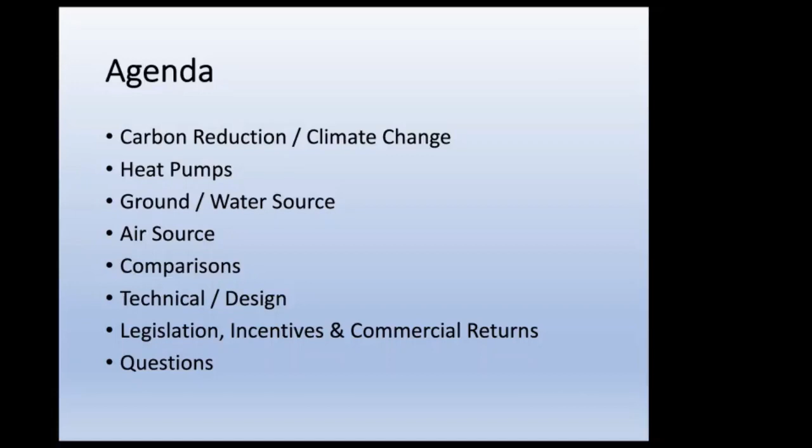So the agenda is round about carbon reduction, climate change, where we are. Probably flick through that because after last week with COP26, we're probably up to speed on that. But just an overview of heat pumps, ground and water source. I'll go through the air source, which we happen to specialise in, the comparisons between the different heat pumps, some technical, some design issues, recent legislation, some of the incentives that are available, and the issues of commercial returns. And then lastly, at the end, I'll answer any questions that you have.

The primary focus has got to be on the understanding of heat pumps and their applications. I won't read through that slide, but we're in a position now where we've got to reduce our carbon footprint. We've got to clean up the air of cities. One of the only technologies we can go to now is heat pumps. Yes, we can wait for hydrogen and perhaps potentially other technologies, but at the moment, if we want to go for net zero carbon with low local emissions, then the heat pump is the technology that we are using.

Just to go back to basics, the ultimate renewable energy source, of course, is the sun. We're capturing that energy, whether it be through the warmer water that percolates through the ground, that has captured some of the sun's energy, or indeed whether we are capturing the sun's energy in the air that we have around us. We've got to get back to that. We've got to remove ourselves from fossil fuels.

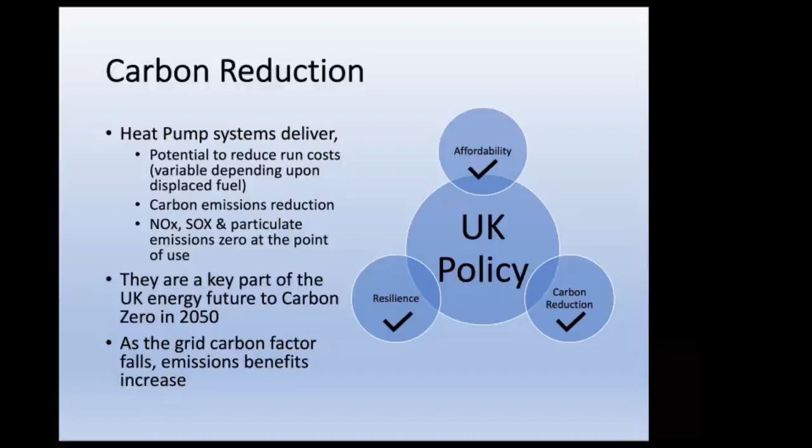Why act now? Well, I think we're at a stage, we've all read the newspapers the last few days. We are now at a time to stop irreversible damage. Current building regulations now are beginning to identify the problems and to force us away from fossil fuel dependency. Public awareness is shifting rapidly.

I think a lot of universities are finding now, for example, that the students are demanding that the campuses are decarbonised. Generational pressure. The young people want answers. They want a secure environment to live in. We've got the Greta and Attenborough effect. Every time you turn the television on, we have news of climate change devastation somewhere.

We have got the technologies now that are tried and tested, although they're not here in the UK in the numbers that they are in Scandinavia. For example, 65% of properties in Denmark are on district energy, and heat pumps are the go-to technology for district energy centres. So although it's not here, we can bring that technology over. It is tried and tested, and we can begin to modify it as we must and introduce it into the UK.

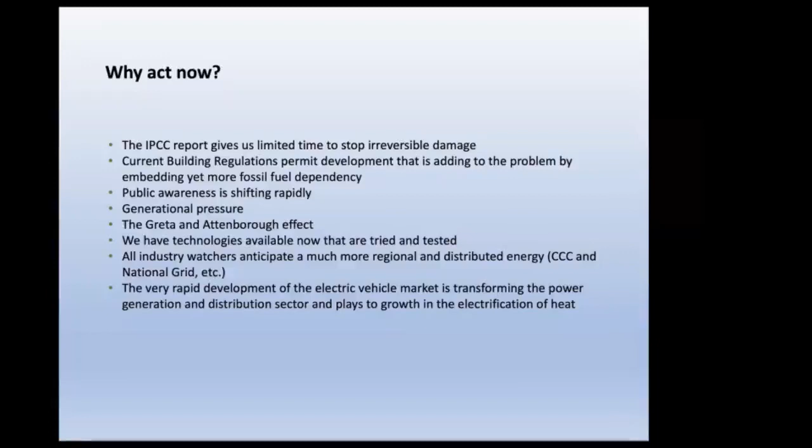We've also got the rapid development of the electric vehicle market, and we've got to hope that the national grid can cope with the pressures that heat pumps and electric vehicles will place on the systems. I guess you've all seen those graphs before. The decarbonisation of the grid, the carbon levels now are a fraction of what they were, and going forward past 2032, they're only heading in one direction.

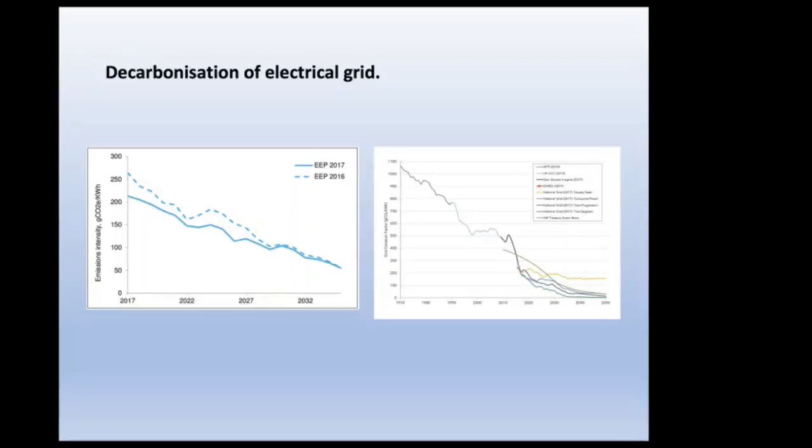We were up a few years ago at 500 grams per kilowatt of electricity. Now we're right down into the tens, occasionally get as low as 80, but certainly averaging between 100 and 200. This is an indication of a sample of the national grid. One particular day recently, 83 grams CO2 per kilowatt hour, predominantly, of course, wind and solar, nuclear, gas, biomass. Lower down the table, no coal showing at all.

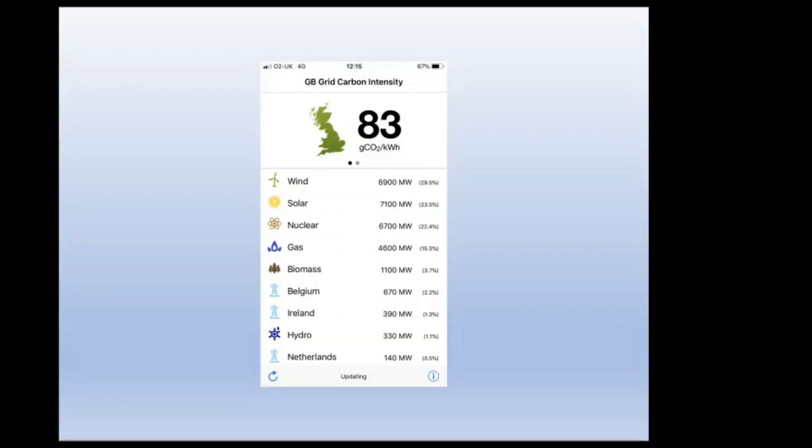Of course, we are still weather dependent. We have to remember that the gas will be with us for some time. We can't depend upon certainly wind and solar. And although there's some good news about smaller nuclear plants, that's going to take some time. But what we can do is we can capture the low carbon electricity that is available. We can use that with good COPs on heat pumps and turn that into very good and clean thermal energy.

If we continue that vein, if we look at the black square there, we've got coal generating 630 grams per kilowatt hour delivered heat, going down oil, gas, direct electric heating, which of course is 100%. But then if you look at ground source, we've got 320% if we have a COP of 3.2, or indeed 400% if we get to 4, which is perfectly possible, especially on ground source.

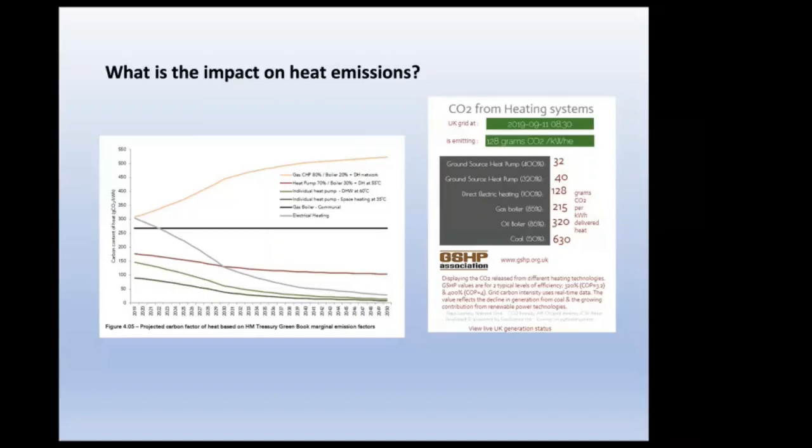What has held deployment back? Well, when you look at those two tables there, if you look at gas, we've got the cheapest gas in Europe, because of various subsidies, and with the tariffs that are thrown onto our electricity bills, bizarrely to encourage renewable energy, some of them, then we've got the most expensive electricity costs in Europe, and that gap is making it hugely difficult to suggest that heat pumps have a payback period.

You know, most people want to invest in new equipment to save funds going forward. At the moment, I have to confess that the large heat pumps are only being sold to people who want to decarbonise and, to be blunt, can afford the capital cost and the increased running cost, and that's not a good place to be. I really do hope that over the next months and years there will be a change of government tack here. We can reduce the gap so that we are not fighting against the high electrical costs.

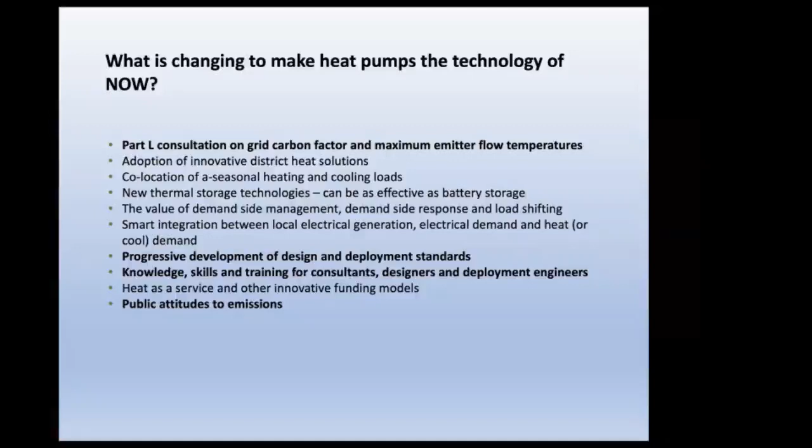Onto heat pumps. I'll just flick through that, but this is the simplest level. It's a box which uses electricity to move heat. You will all have a heat pump at home - it's a refrigerator. It's moving heat from the fridge, from the items in the fridge, into your kitchen, and it uses exactly the same process.

It's only got an evaporator, compressor, condenser, and a valve to control the flow of the refrigerant around the circuit. The electricity that is consumed by a heat pump is to move the refrigerant around. None of the electricity that goes into the heat pump comes out as thermal energy. It's to provide the refrigerant with that heartbeat to move around.

It absorbs the heat, it vaporizes, it is then compressed, and when you compress it, it increases in temperature dramatically, and then through the condenser that heat is released. It converts back into a liquid and then goes through a control valve to start the process again back into the evaporator.

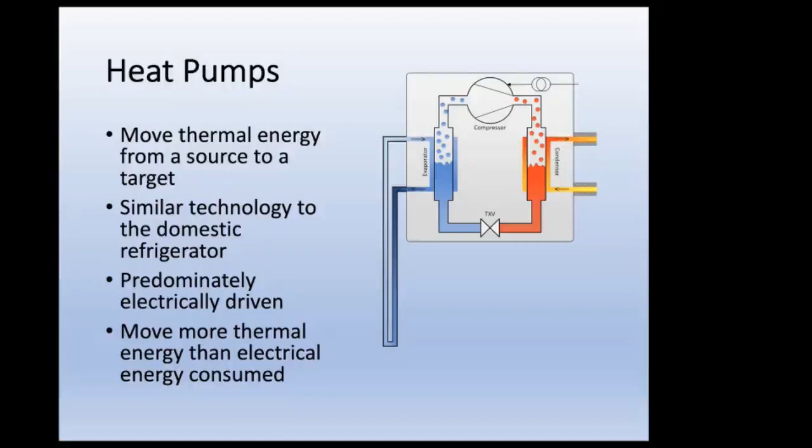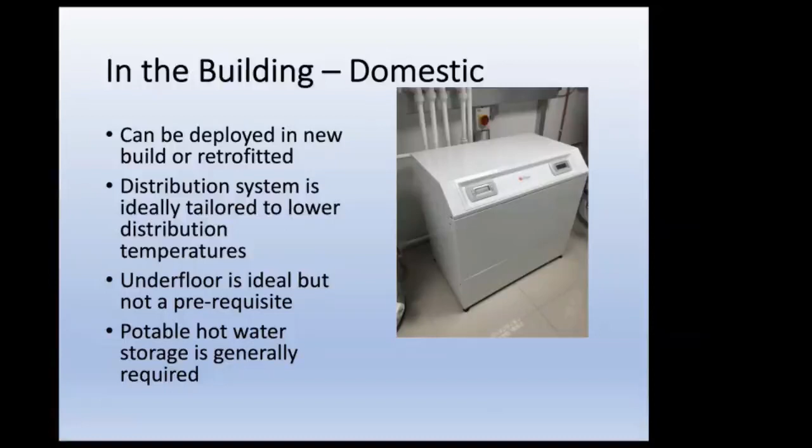I'll flick through these. This is a domestic ground source heat pump. This is just to give you some idea of what it looks like. Remember, we've got to have a ground collector system outside, whether that be open water or groundwater through trenches, which I'll come on to, or boreholes, which I'll mention as well. Conventionally, they are considered to be better with underfloor heating or large heat emitters. That's very often supported with immersions to generate domestic hot water.

Commercial, which is the size that Solid Energy would be doing, is very much similar to the small domestic heat pumps, just with everything on a larger scale. We can heat and cool, and as ever, the control systems are key to this, monitoring the temperatures, monitoring the pressures, controlling the valves, and making sure that the heat pump is running as effectively as possible.

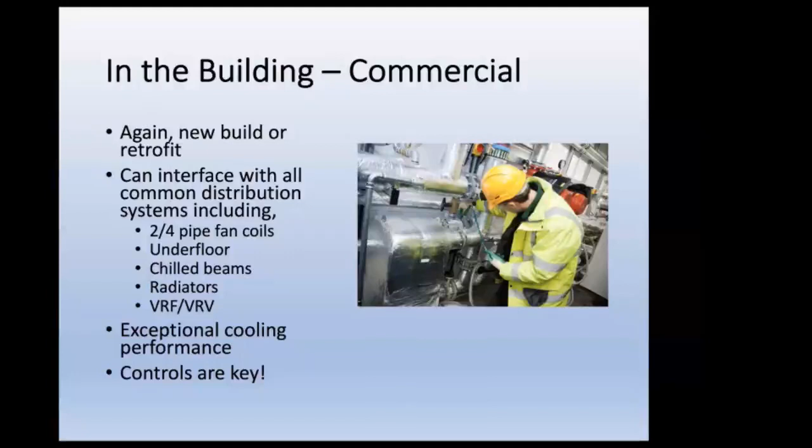On the ground source heat pumps, we've got to understand that the important aspect of this is the drilling and the geology. Ground Source Heat Pump Association is a place to go for this, and the British Drilling Association. Drilling standards are being rewritten - they have to be, and they do have to be rigorously enforced. The quality of the water collection cannot be understated, and there are unfortunately some examples of inadequate ground collectors installed by people who are not following the standards.

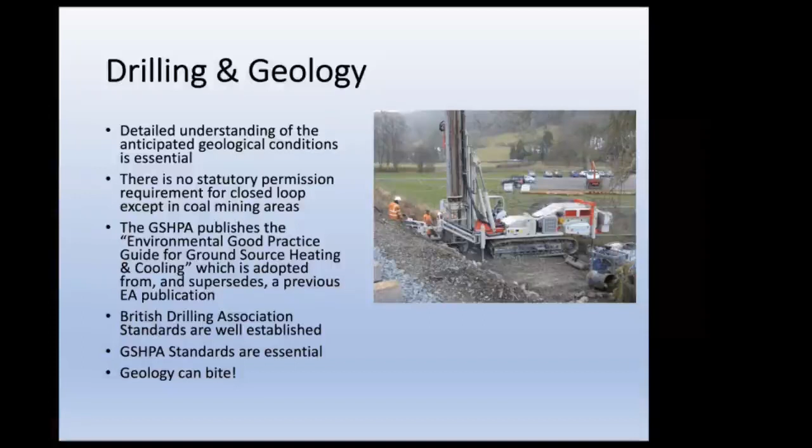Open loop systems are taken from lakes, canals and rivers. We've got to remember that we don't particularly want the source water to go through the heat pumps - we would prefer plate exchangers in between. So if there is any cleaning to be done of any biological growth, that can happen within the plate exchangers and not the heat pump.

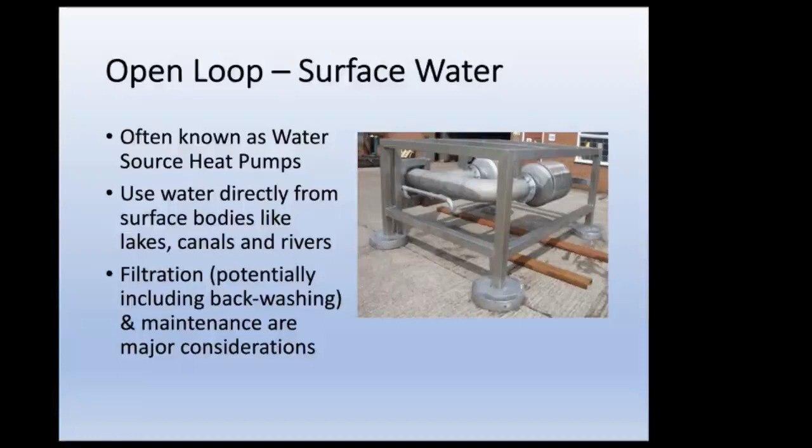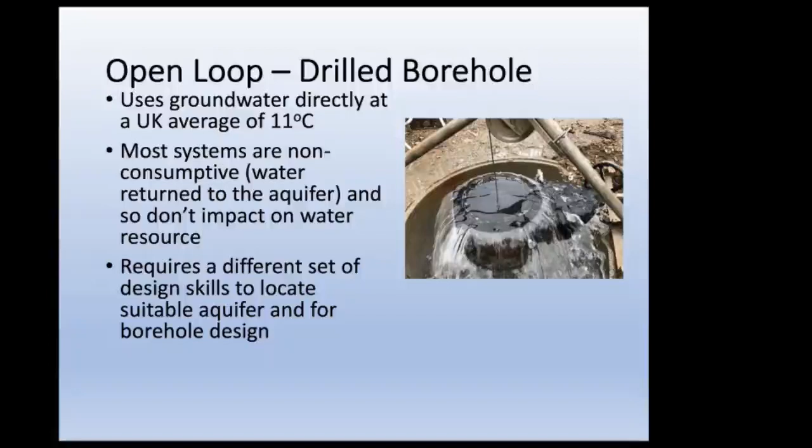Boreholes - drilled boreholes, UK average coming out to around 11 degrees C. Non-consumptive: the water can go back in, so we're not using the water resource, we're just using the energy out of it. But we have to make sure, of course, that we are putting the water back into the ground a distance away from the supply. So we can't suggest that boreholes are going to be very easily installed everywhere - we need the right ground surface, and we need the buildings to have the ability to have boreholes at a distance.

Closed loop, where we put a heat exchanger out into a sea, a river or canal. The main concerns is how to anchor it down, and also, of course, how to maintain it. So it's got its advantages.

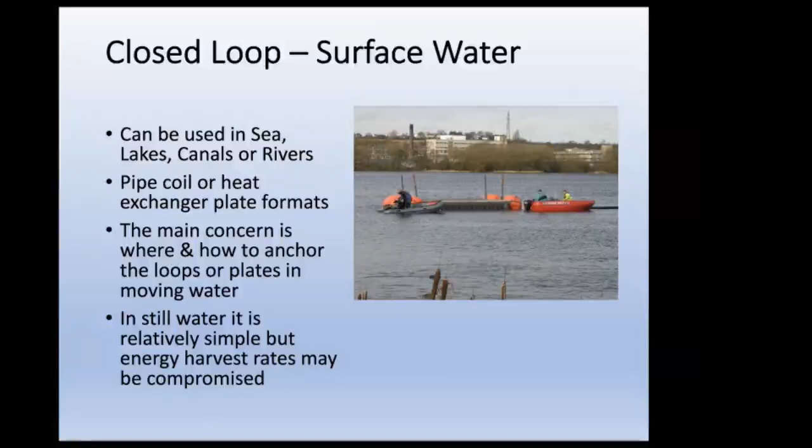It's got its disadvantages though when it comes to maintenance. Ground loops, much more conventional now, where we are putting loops down boreholes, pumping water down into the ground, chilled from the heat pump, allowing that to be warmed up and coming back to the heat pump as an energy source.

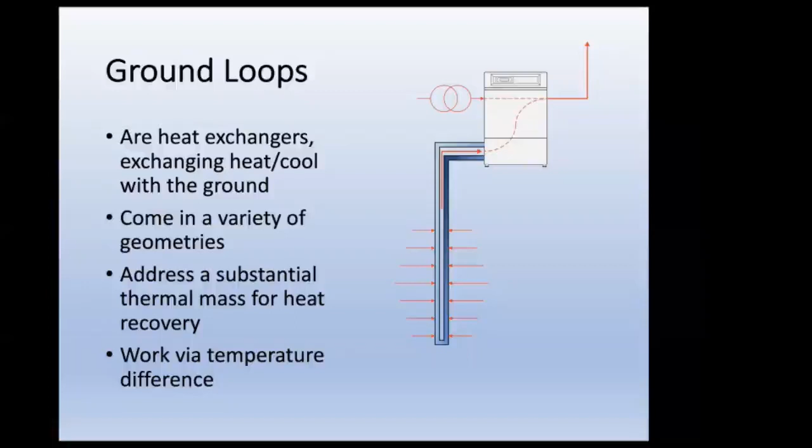Closed loop horizontal, plenty of land needed here, trenches a metre wide, largely depending upon, again, on the local geology.

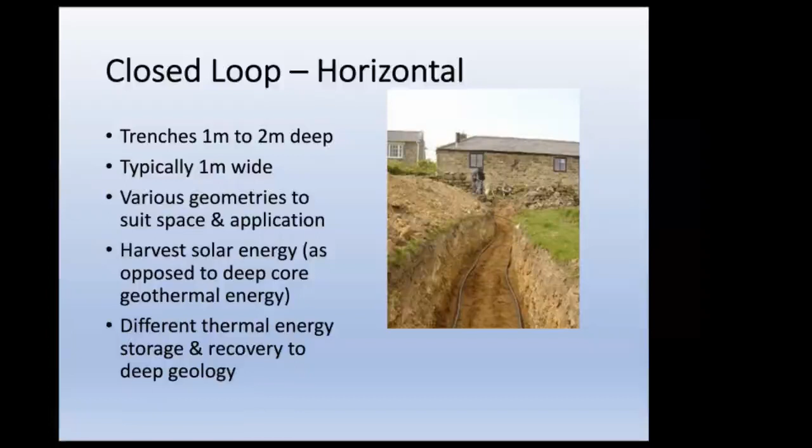This is harvesting still solar energy. The heat replacement will be through rainwater, which is surprising. Boreholes do have an element of geothermal energy in them, but here we're capturing solar energy in the form of rainwater percolating through the ground.

So there's a vertical drill closed loop, conventionally 150 mil, 5 to 15 metre centres, and we go down to what it says here, a maximum of 300, conventionally more like 150 to 200 meters.

Again, depending on the geology, and one of the disadvantages of ground source is that there is a need for a report, a feasibility study to be carried out, and of course those are expensive, and at a commercial level very expensive, and they may in fact only go to prove that ground source isn't feasible.

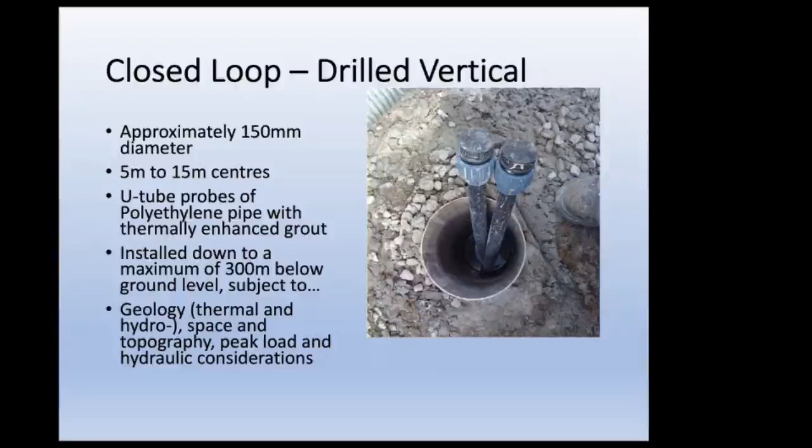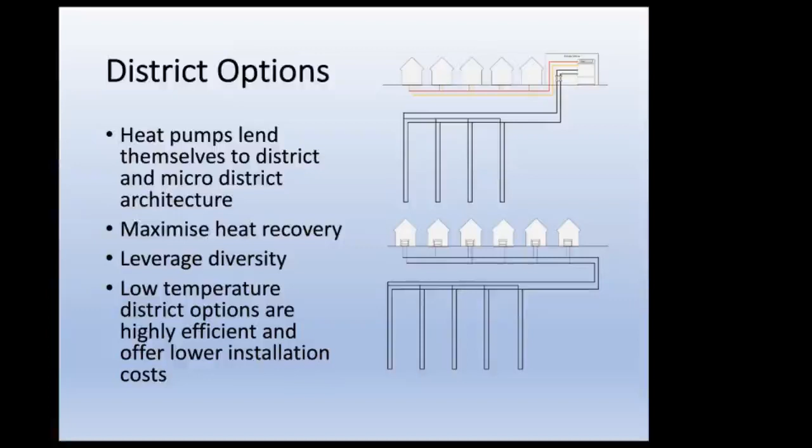District options, we've got now 4th and 5th generation, where we can have one main heat pump supplying numerous properties, or alternatively shared loop in the ground serving heat pumps within each individual premises.

On the planning side, this is really the stick bit of heat pump deployment. The GLA back in 2019 invoked a recommendation from BEIS. BEIS were wanting to give this a bit of thinking time, but the GLA came in and said no, from now on we're going to use the new SAP regulations.

We're going to encourage the use of heat pumps, and we don't want any more gas CHP in the boundaries of the GLA.

Sadiq Khan, he said that in the early 50s they closed the power stations, Battersea, etc., to clean the air, and ever since then we've been putting in mini power stations, which largely defeated the object.

So the GLA guidance was interpreted by the planners more as a regulation than guidance.

So London has been the centre of interest with heat pumps. A lot of projects that I've been involved with have been in London, and over time, of course, using the Merton rule, what London does, the rest of the country will follow.

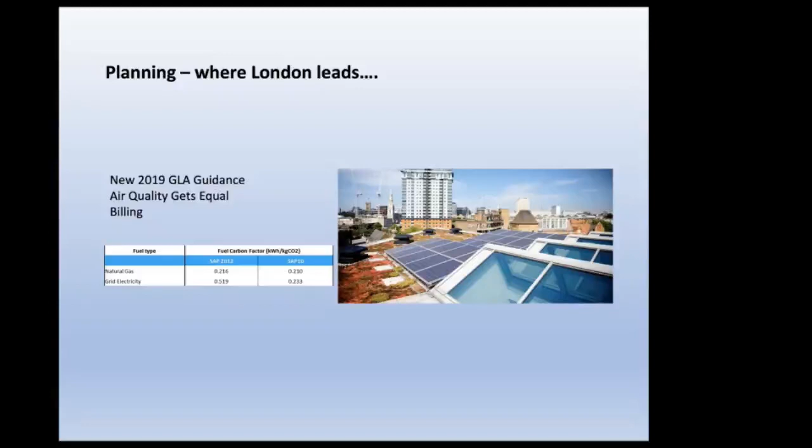This is talking about capturing overnight tariffs. One company happens to be Octopus. They're using agile tariffs to encourage all heat pump users to build up

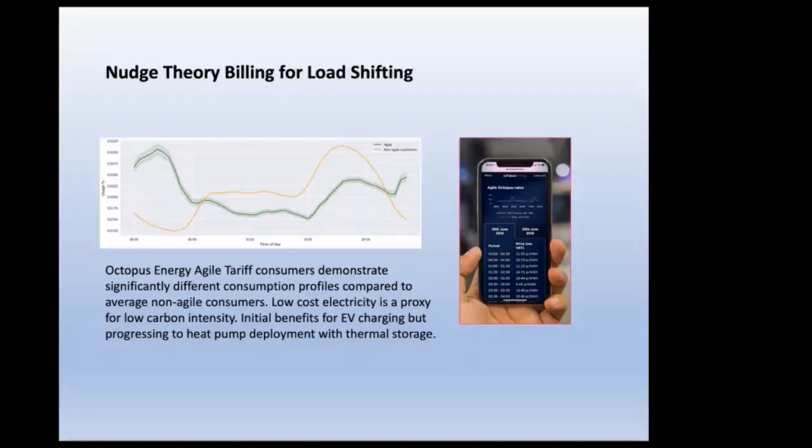thermal loads during the evening, overnight, when the electricity supply is cheaper, so that the heat store then can dissipate the heat during times of expensive electricity costs.

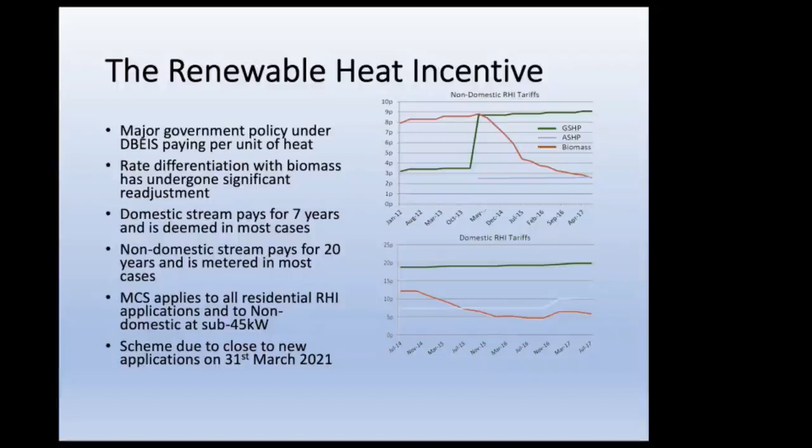That one can be dispensed with. Bit of history now, unfortunately, but the renewable heat incentive was a bit of a disaster when it came to heat pumps. Generally, went on to biomass, and I think an opportunity was lost with regard to using it for heat pump deployment.

On ground source, when you are looking at contemplating ground source heat pumps, there is a lot of agency regulation. I was speaking to one guy from the EA last month, and he unapologetically was telling me that they're overloaded. There's not a lot they can do about it, and it's going to be 6 months before they can promise to do much about it.

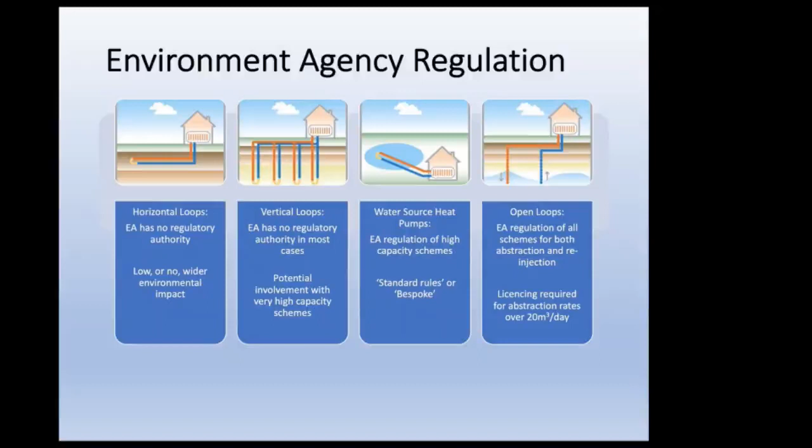So there we are. The EA are interested, of course, in making sure that they do look after the water courses, and rightly so. But there seems to be a reluctance to actually resource themselves sufficiently to deliver a good service.

Standards on ground source. We've got a number of guidance documents there, including, of course, your own CIBSE library.

And then just to go on to air source heat pumps. Why air source? Well, to state the obvious, it's always there. There's no problems about access to it. There's no tax, duties or fees yet.

It's non-polluting. They can produce good COPs, and the installation costs are much more predictable than ground source. There's no reports needed. There's no geologists needed on site. There's no licensing from the EA.

So there's a lot of good points, but, and there's always buts, we need a large footprint for evaporators, especially at commercial level. We've got to worry about noise. We've got to worry about cold air plumage. Where does all that cold air go after we've abstracted the energy from it?

Defrosting. We've got to worry about chilling air at 5 degrees. We'll chill it down to freezing. So we've got to know what can we do about that.

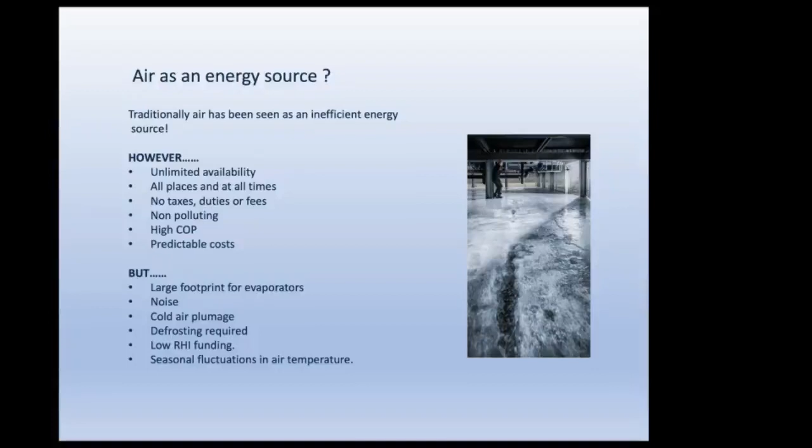That's what a domestic heat pump looks like. Just for those of you who haven't seen it, sitting outside a property.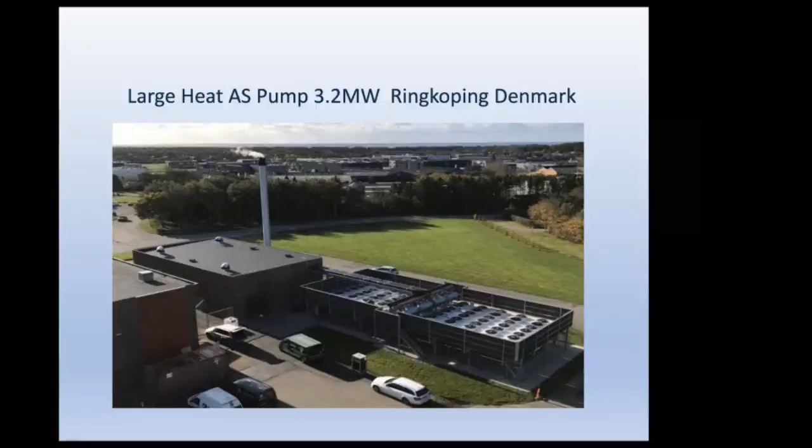If you are underneath those evaporators in the summer, it is a very pleasant chill. If, however, you are underneath there in the winter, it is mighty cold. So we've got to worry about where the cold air goes. You'll notice that the location is quite a long way from residential accommodation. That is because of the noise issues. So when we want to put these in the middle of London, we've got a few problems to contend with.

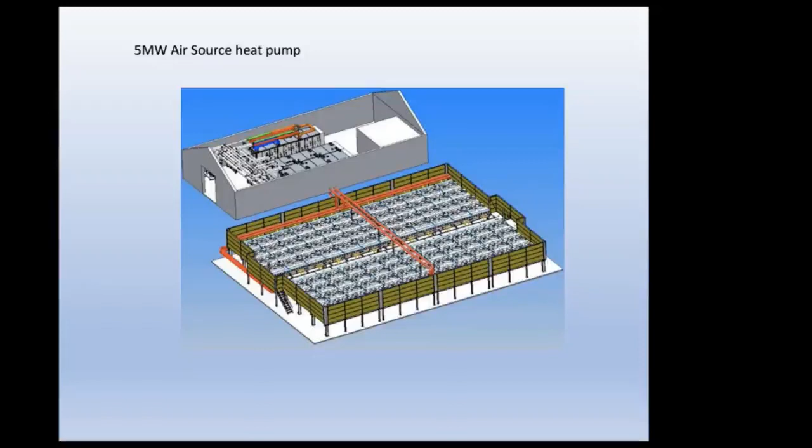That's what the 5 megawatt air source heat pump looks like. We can think about 2 tennis courts plus the building with the compressors in. So again, we're talking a lot of land.

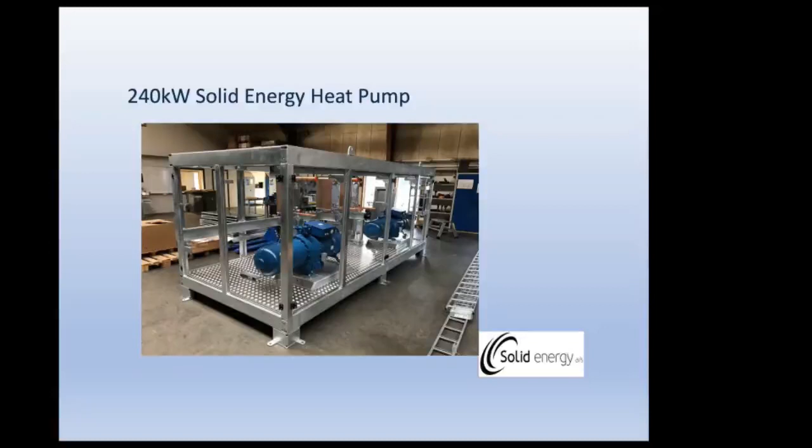That is what a 240 kilowatt solid energy heat pump looks like. 2 compressors. That is twin stage. That would be able to raise water temperature up to 90 degrees. If it was just one compressor, we'd be going up to 65 degrees.

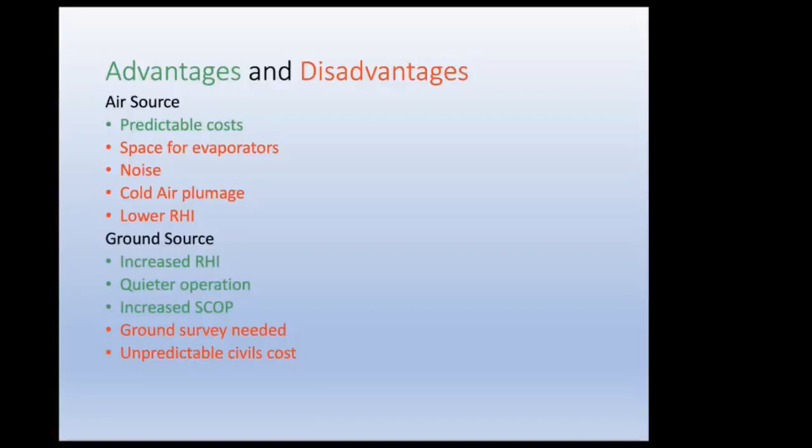Some of the comparisons, the advantages and disadvantages. Air source, we've got predictable costs, but we've got the problems of space, noise, cold air, lower funding that was. Ground source, we had better RHI. Ground source generally quieter, we've got no fan noise. Generally increased seasonal COP, but we've got the ground survey costs and also the unpredictable civil costs.

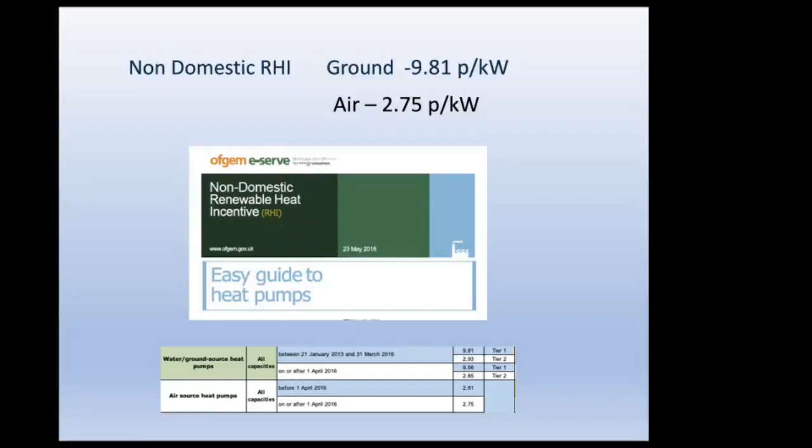We can flick on from that one, but that's just to show you the difference. Before our RHI was closed down, people were getting 9 pence for ground source and only 2.75 for air source.

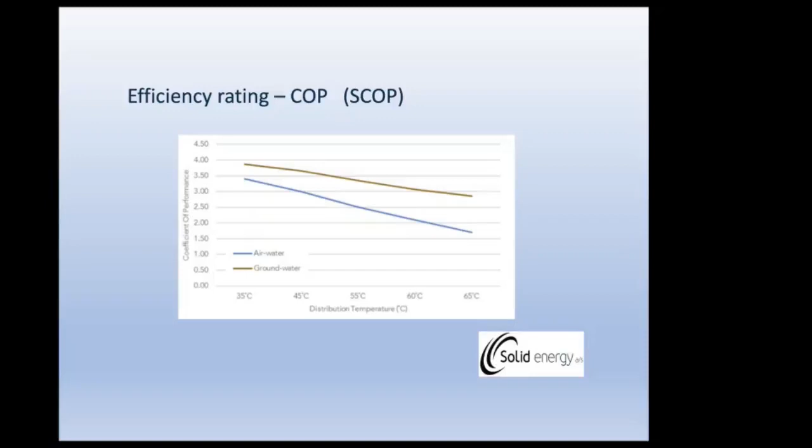The efficiencies of heat pumps in comparison, this is very general, but ground source, because the controls and because the heat pump can be designed specifically for a constant temperature throughout the year, especially on deep water. Okay, rivers might change a little bit, but no water changes in temperature as much as air across the seasons.

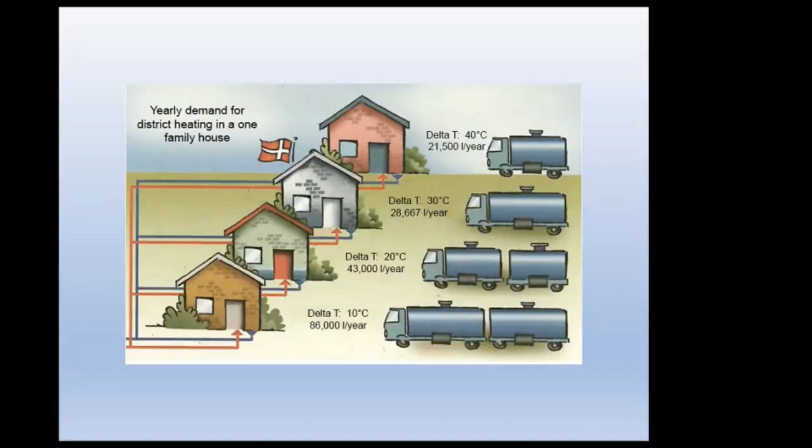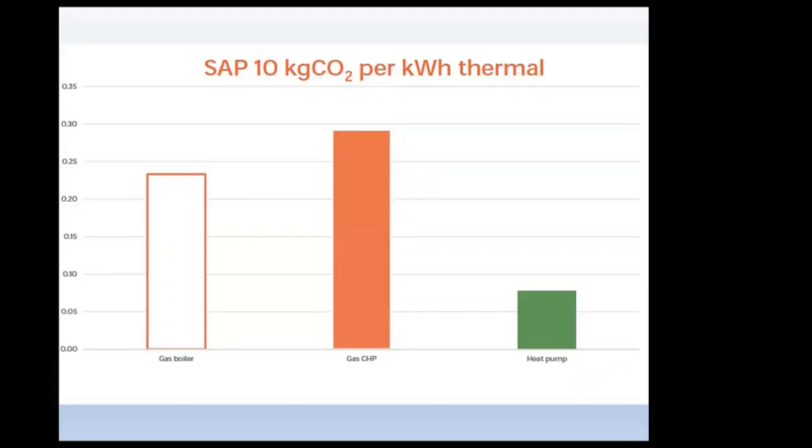Interesting that that's one slide from Scandinavia, which always amuses me when we've historically been using 82, 71 operating temperatures in the UK. I think we've been through that slide. That's the old regime where the heat pump was seen by the planners as a poor alternative to gas CHP, and that is the new regime under SAP 10.

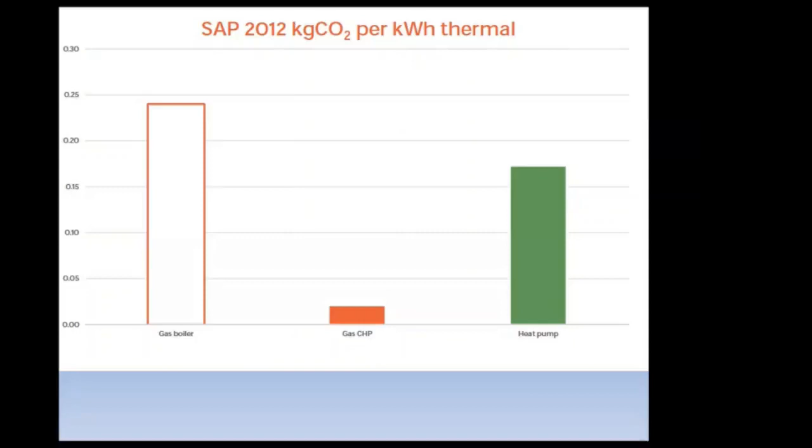The economic potential, some of these are achievable in certain circumstances. I would suggest that heating cost reduction by 30% is unusual. It can be done, it's got a bit of salesman's talk about it, I'm afraid, but if you're on oil and you've got really good opportunities for ground source, you may be able to do that.

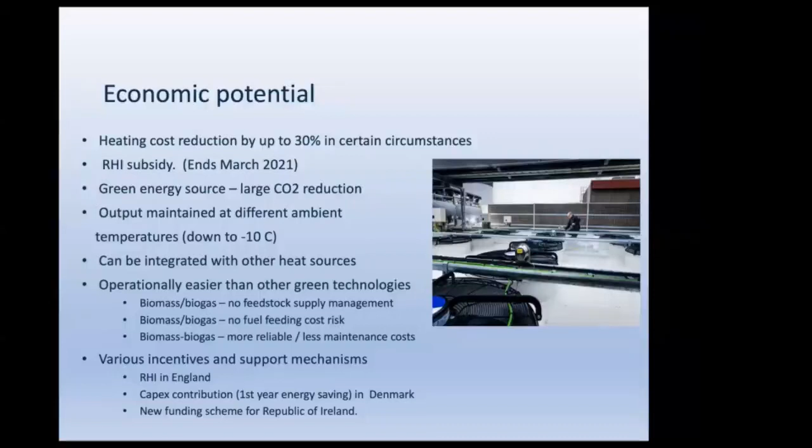I think the line there that I'd like to talk about is the integration with other heat sources. I think that if a commercial building especially has got a fully functioning fossil fuel system in, then rather than contemplate taking it out, a really good alternative is a bivalent system. Put a heat pump in, allow it to do up to 90% of the load, which can reduce the carbon footprint by 90%, but that's probably at half the price of ripping out the gas and going for a 100% heat pump solution.

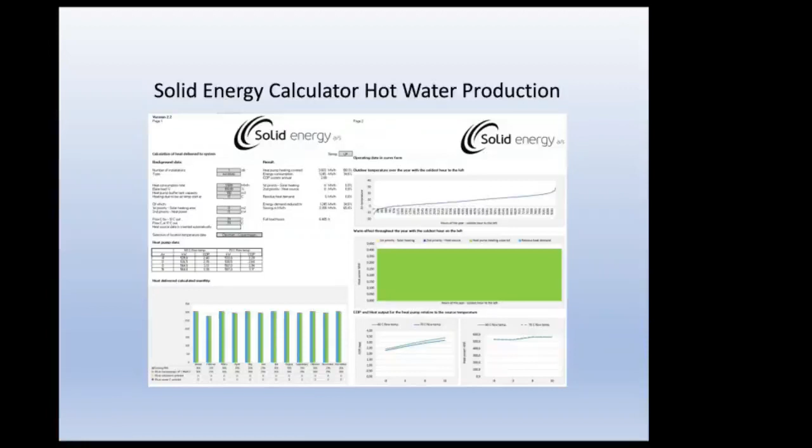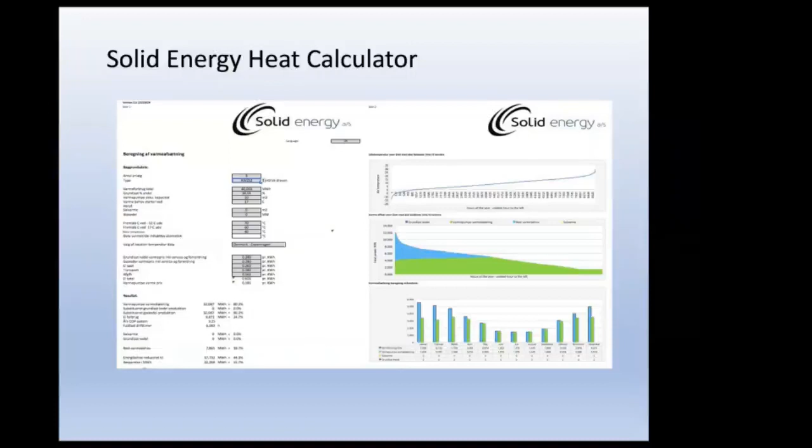If you want to go into the technical details of sizing a heat pump, I can let you have a calculator which helps put the flow and return in, the heat demand, and it will give you numbers as to what heat pump you actually require. On the graph on the right, the blue section is actually the heat demand that is not covered by a heat pump. That's a bivalent system, whereby the green is the heat pump input and the blue would be the existing gas or oil boilers.

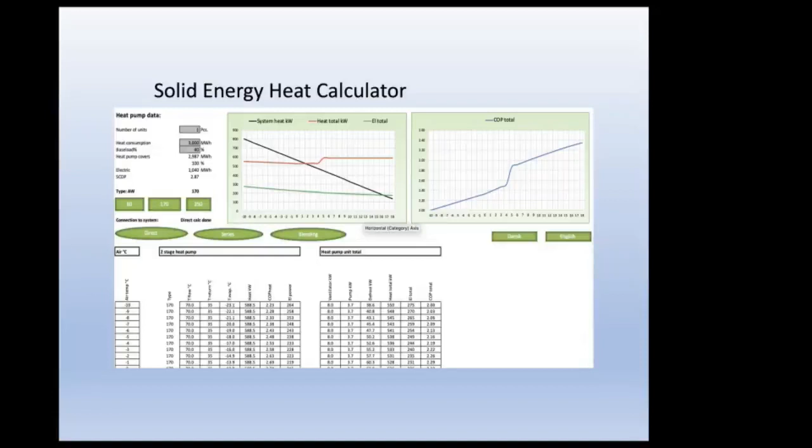But for air source heat pumps, there is a defrost cycle, and that does impact on the overall efficiencies.

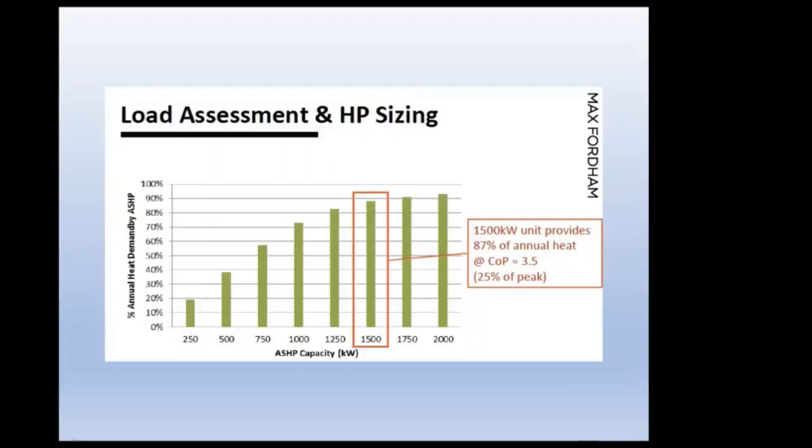This is another graph to show you that if we design a heat pump to deliver 1,500 kilowatts, that's surrounded by the red line, we can actually deliver just under 90% of the load. And if we do that, rather than supply a 2 megawatt unit, we are reducing the capital cost significantly, and we're allowing the gas boiler to do what it's there for, to top it up, and of course also to provide some resilience.

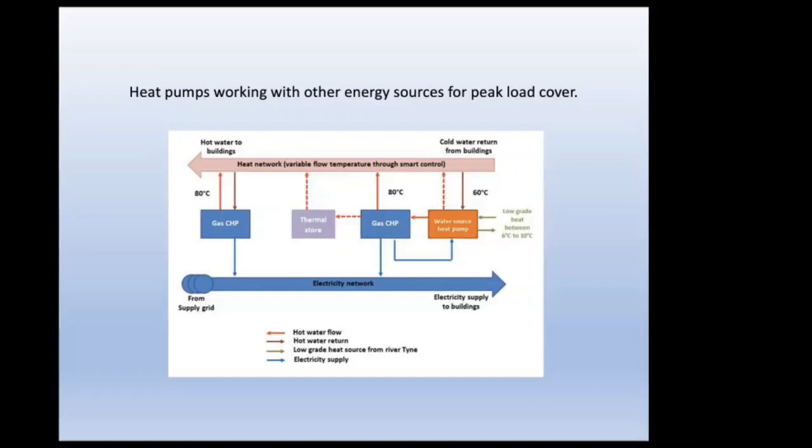Another diagram, this time showing heat pumps working with other energy sources for peak load cover. Here we've got a gas CHP and a thermal store, and a water source heat pump, again probably providing certainly more than 50% of the energy demand.

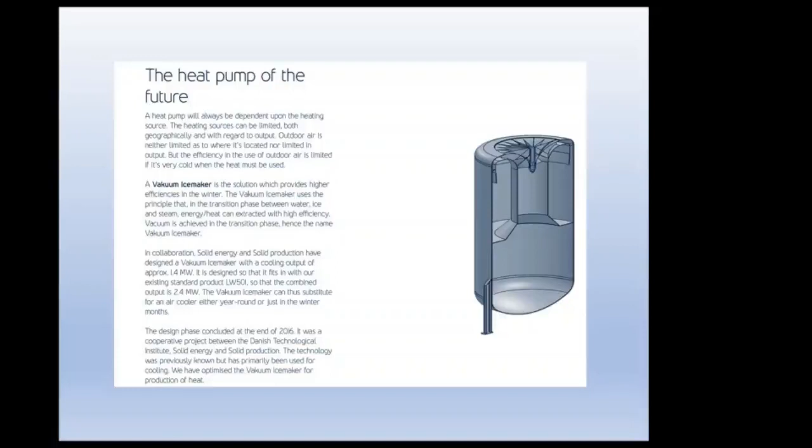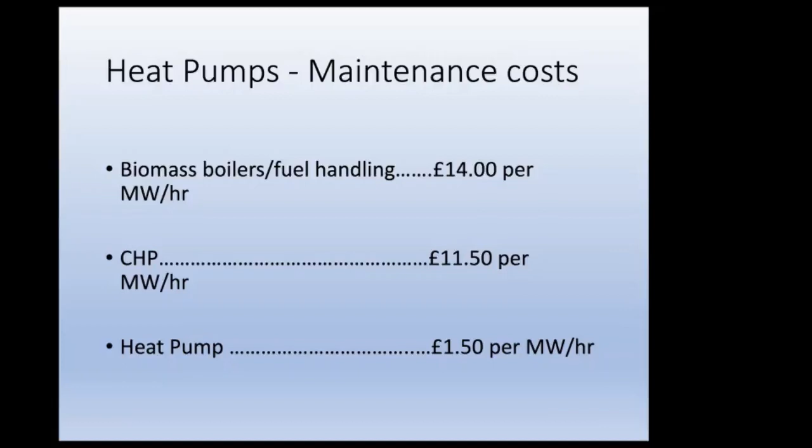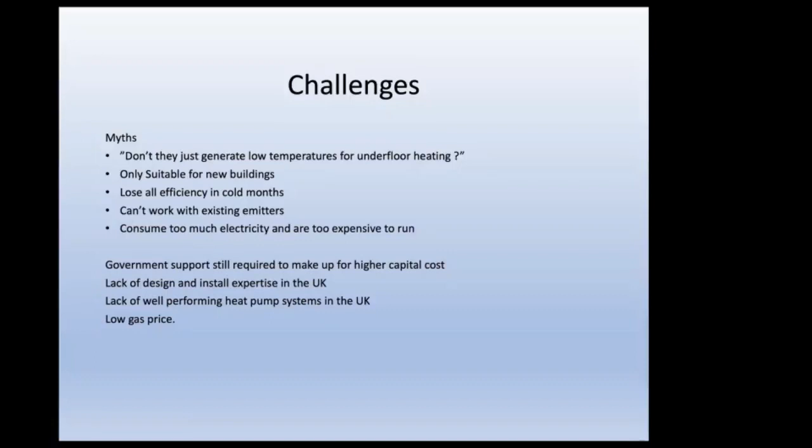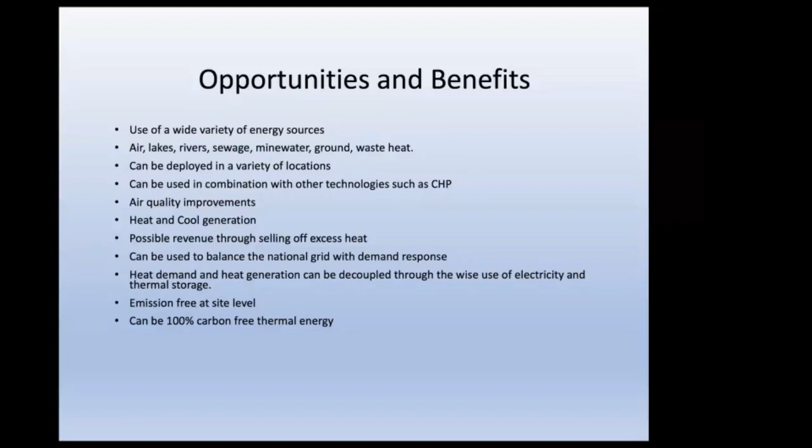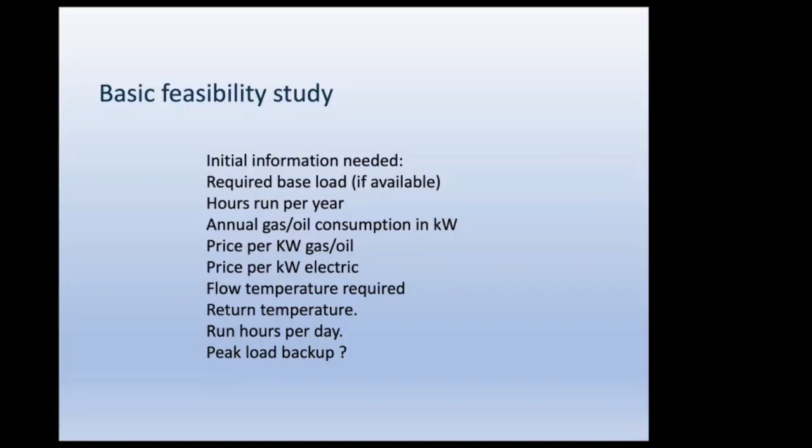I'm sure this presentation will be available. Actually, there are a couple of other slides on challenges, which I suppose we need to just mention. They are not only suitable for new buildings, they don't lose all efficiency in the cold months. So it's half truths which have been turned into fact, really. And there's some opportunities and benefits of heat pump deployment, and that's the information that anybody would need for a basic feasibility study on whether a heat pump is suitable.